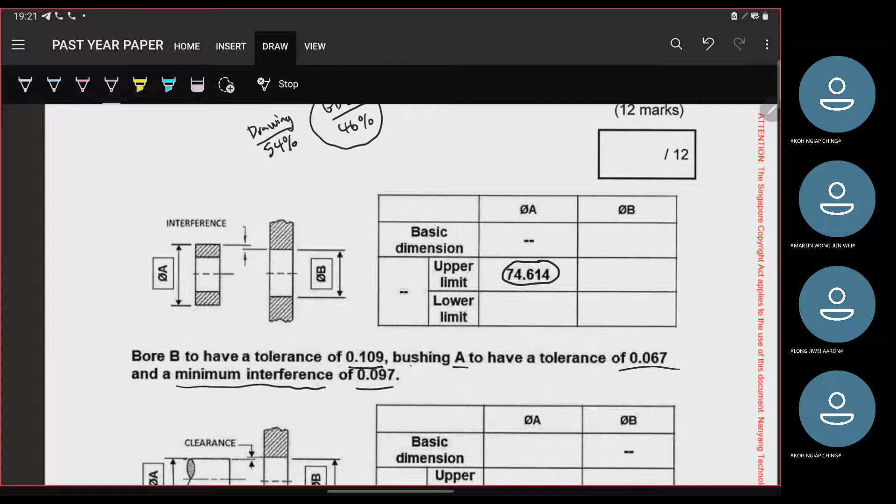So they tell you, Bore B to have a tolerance of 0.109. So tolerance band, this you can just take as a whole tolerance band. So then you can just use your calculator. For example, 74.614 minus—because this is upper limit, right, so obviously your lower limit will be lower than that. So in this case, this will be 74.505.

Then after that, more often than not, what you do from here is go upwards diagonally first—I'll explain why later. So upwards, then they tell you minimum interference 0.097. So 0.097 means you minus. So this is 74.408. Then the last one, the tolerance is 0.067, minus 0.067, 74.341.

Then after that, the last part is that this will always be maximum material condition. So that means this is gonna be 74.341. Okay, let me explain this.

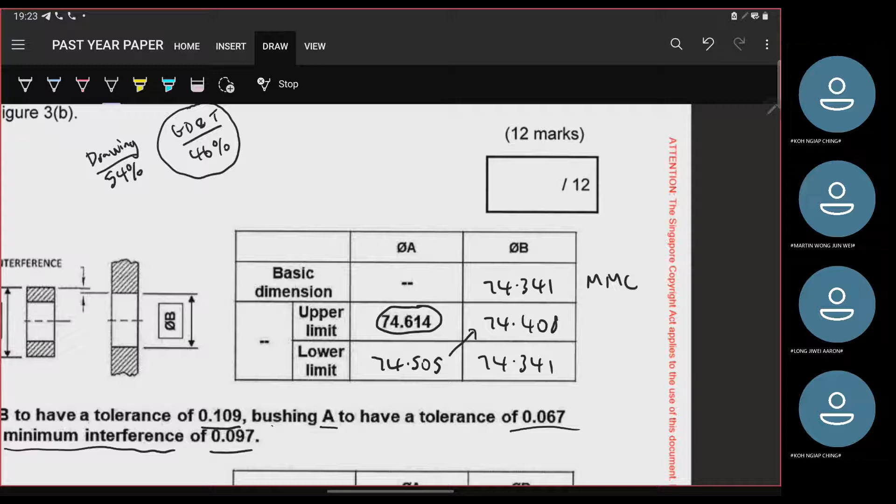Okay, yeah, so let me explain this. For these values, first thing, I think most of you all should be able to understand why I go from upper to lower limit. So the thing now is, theory wise...

So they tell you minimum interference, correct? So minimum interference means there's a maximum interference in a sense, which means this point over here, the biggest point—the smallest shaft should be linking to the biggest hole, because if you have a smaller hole, then the interference is gonna be higher. Or say you have a bigger shaft and a smaller hole, then the interference is gonna be even more. So what's gonna be the minimum point?

Will be from the smallest shaft to the biggest hole. Biggest hole. Okay, does that make sense? I hope that makes sense.

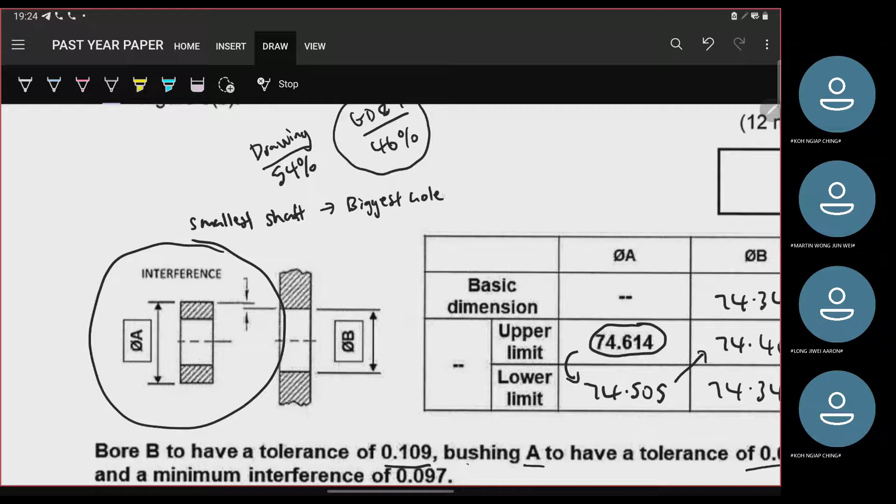So because of that, that's why you go upwards instead, that's why you have to minus and go diagonally. So you'll notice if you do more practice that most often it goes like this, in this direction, so it goes whatever limit they give you, then you go up or down, then after that diagonally, then after that go down again, something like this.

Let me see if I can.

So I hope this part is understandable. Okay, so this is one part. The next part is going to be a similar question, but this time they tell you what the hole is first.

This time they tell you the hole has a tolerance of 0.128. The original size is 56.635 plus 0.128. So this is going to be 56.763.

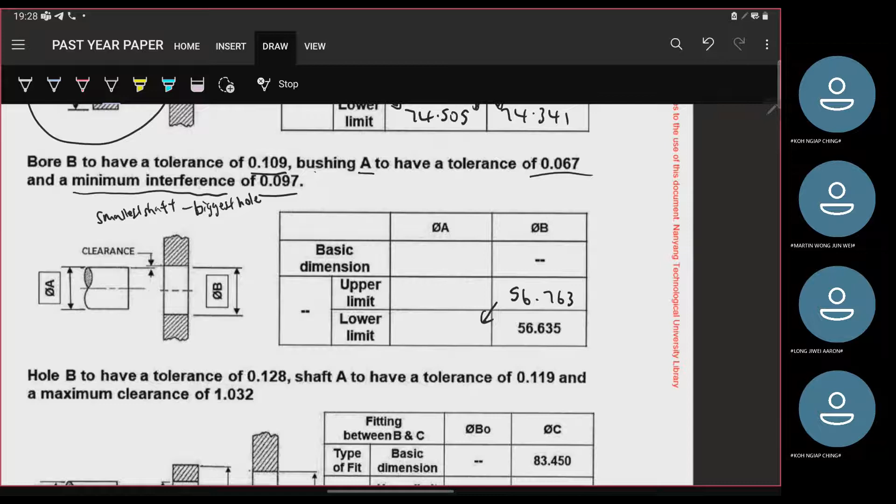Then they tell you it's 1.032. So that means 56.763 minus 1.032, and after you get 55.731. In the event where it was interference instead, A will be more than B. But since this is clearance, B should be more than A. I hope that's clear.

After following this, you just need to add the tolerance again. Shaft A has a tolerance of 0.119, so you add 0.119. So this one you get 55.850.

Then after that, same thing, same logic. Your basic dimension is going to be your maximum material condition. In the event of maximum material condition for shaft A, it's going to be your upper limit, that's the biggest. So this is 55.850, and this is your basic dimension for this question.

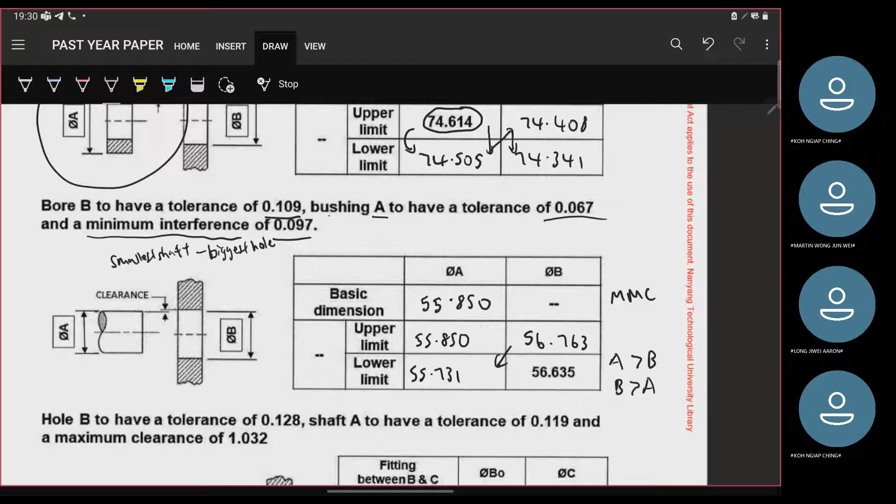I hope you're not too lost. Stop me anytime you get confused. Okay, so next one.

The next part of the question is basically kind of like cross checking. What you do for this is you have to look at the chart at the bottom, at the end of your paper, then you have to just do the calculations.

So the first thing they tell you is that it is 83.45. Put it 83.45 first. This is housing, so this is housing first. They gave you housing first, then they tell you it's force fit, between bushing B, and housing C.

Usually when they give you say a hole first, and they give you the dimension already, you can take it as this is going to be a hole basis. Then like for the next question, this is they give you A first, which is shaft, so this is going to be a shaft basis question. So they kind of test both directions.

So then with this, you've got your condition already, which is force fit. Then after, you also got the length, which is the diameter of 83. That means you can do your referencing already. Wait, okay, I'm not going to—it's a bit hard to scroll down, but never mind.

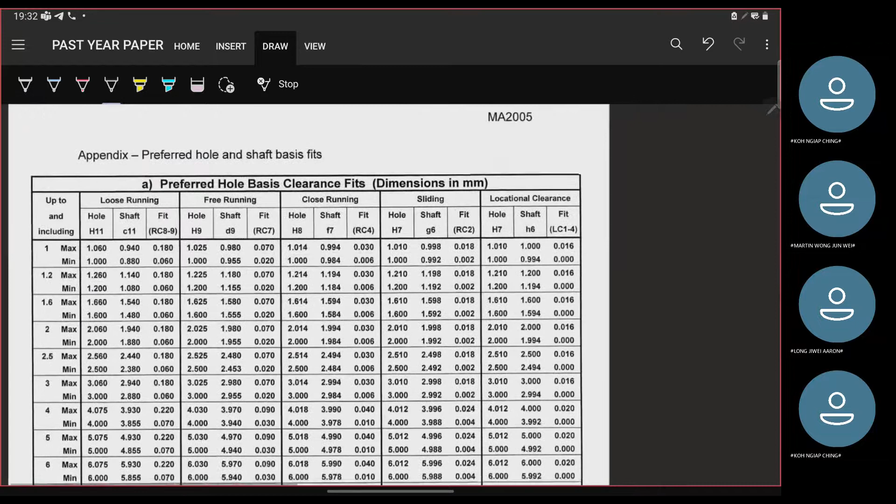I'll just go down. So force fit, usually this—so now you want to do shaft base, hole basis first, right? That's the first question. So hole basis, so you go to force fit. Then after that you're going to use 83.45.

So 83.45, when you look at your chart, this is up to and including. Since we have the value of 83.45, we have to use the 100 one, because 80 will not be used since it's up to 80 only. So this is going to be up to 100, and then after that, basically what we will need is this part.

Okay, so it's hole on the left and shaft on the right. These are all the measurements you need. Basically they'll tell you the maximum is plus 0.035, then after this is plus 0. This is for your hole.

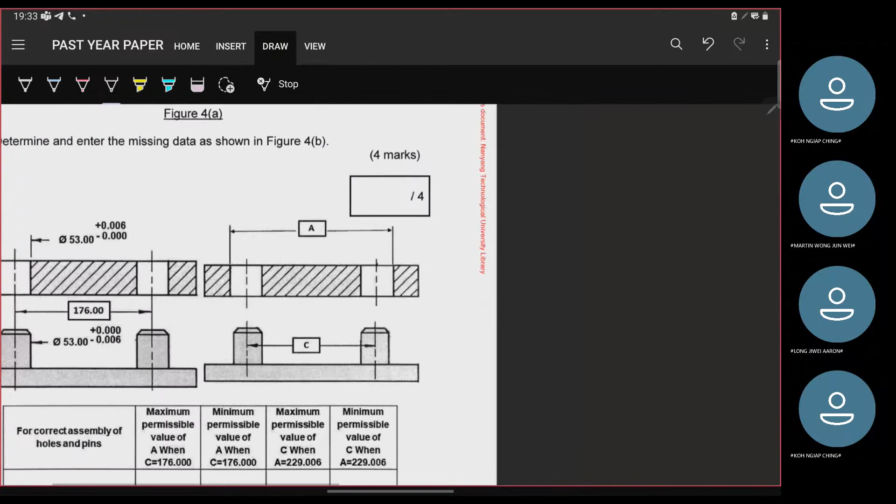So what you're going to do is transfer this all the way to the top. From there, 83.45, right? The first one, they tell you the upper limit is plus 0.035, so you add 0.035 and get 83.485. Then they tell you the lower limit is plus 0, so you just write 83.45 as well, 83.450. Okay so far.

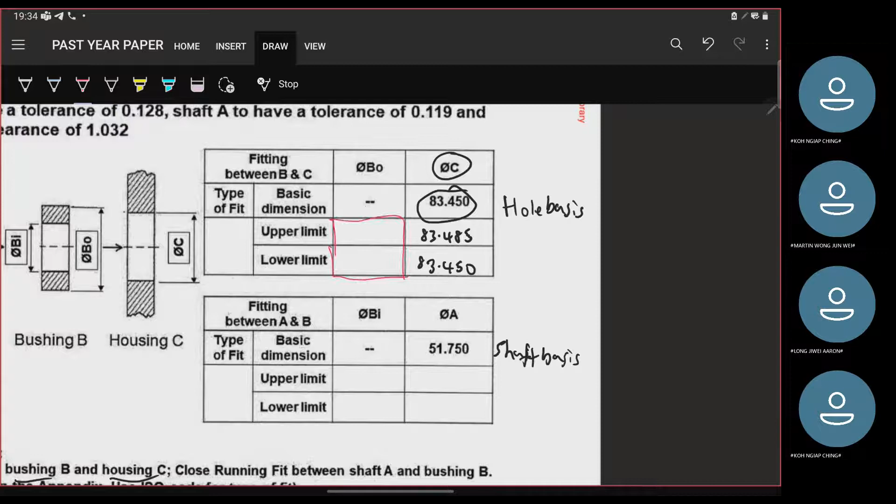Then after that, you need to fill in this zone. Now we're going to look at the limits again. One way you can identify is that we like to do the crisscross, like that. You can basically do the same thing. So this is plus 89. You can tell that the shaft is going to be the bigger one, from the biggest one, then you add this 89.

Then you can see the values here. The first diagonal is this one, then the second diagonal is this one. Why is it negative? It's because it's 0.035 minus 0.124, but it's because of interference. Since we have all these values, we can use the 0.089 and 0.146.

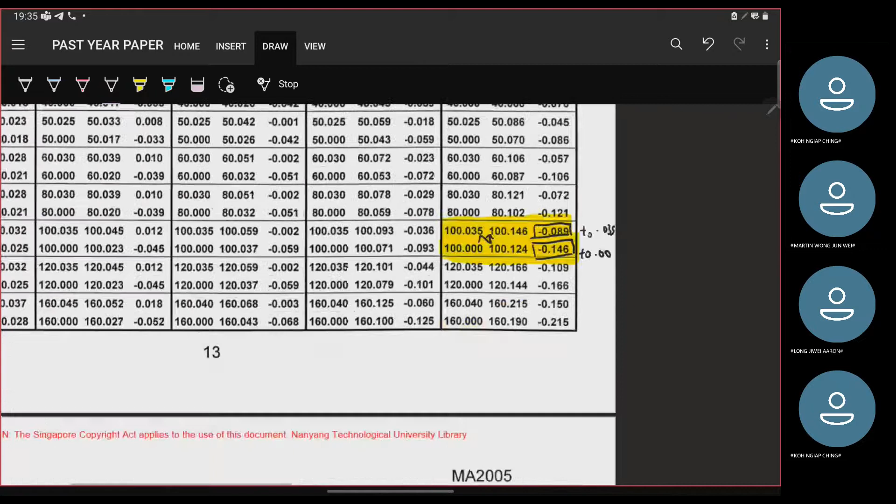So you can add 0.089 first. This will give you a value of 83.574. Then the last one to add: another way they tell you is the gap between lower and upper is 0.146, which means from our value we can also add it in. So 83.45 plus 0.146, you should get 83.596.

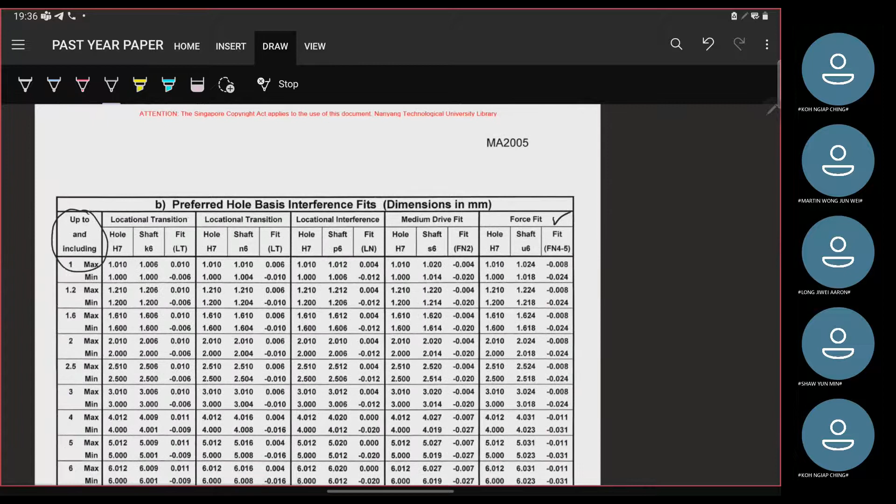Then the last part is the type of fit. For the type of fit, they tell you to use the ISO code, which means for the force fit, the ISO code should be this one. Oh wait, sorry, it's this one: H7/U6. I'll double check this again, but it's most likely correct. H7/U6.

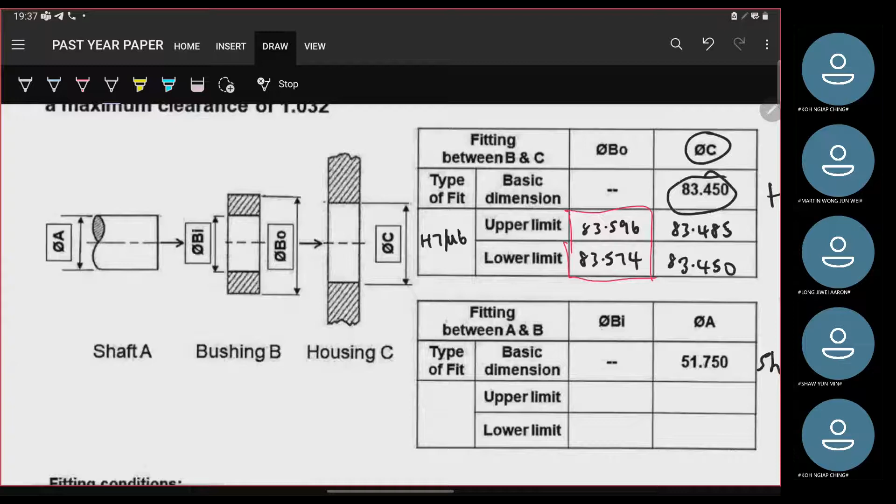So so far all clear, right? Let me just double check on something. Yeah, correct. So this is how it is going to be. Similarly to the first part, now we're going to carry on with the second one.

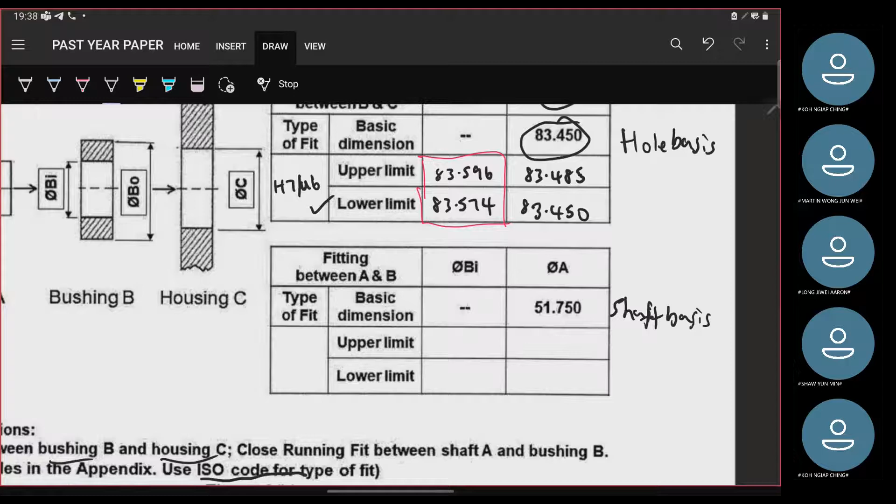For the second one it's pretty much the same, just that this time we are looking at the shaft basis. They tell you it's a close running fit. I'm just going to use my own chart so that you don't keep seeing me scroll. So this shaft basis, 51.75, close running.

I'll write the values at the side. So this is close running, F8/h7. Since 51 means we cannot use 50, we must use 60. The values that they give are 60.076, 60.030, 60.000, and the last one is 59.970. With that we can basically start already.

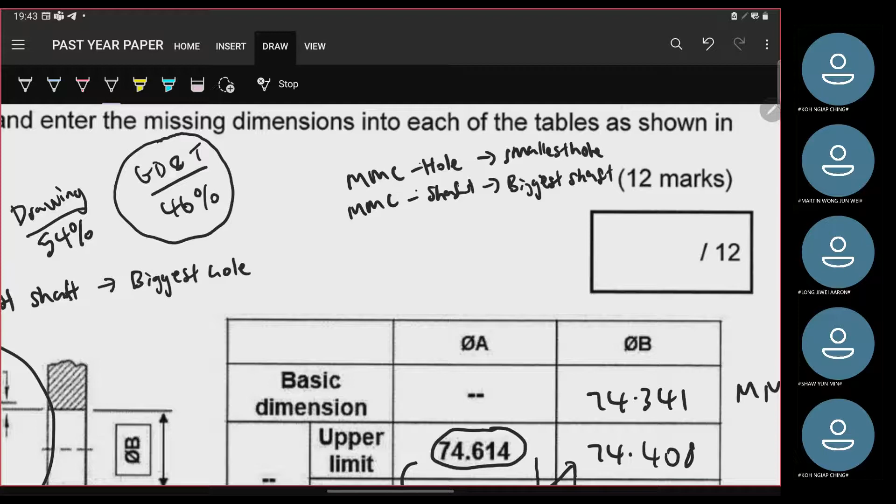Okay, but usually basic dimension, later if you look at how it usually is, it's a very nice number. But yeah, usually it's the MMC.

Yeah, so for this question, there won't usually be a case where you will have the shaft being the MMC. You won't really take the LMC to answer the basic dimension.

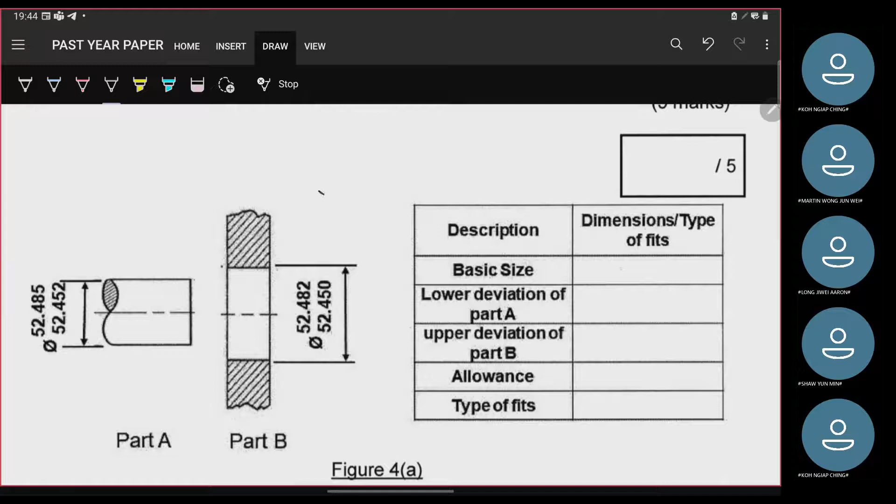Okay, so I'll just move on to 4A. For 4A, it's similar to your first question. So usually your basic size is gonna be in this case - it's usually taking this one, because it's the nicer one. So usually your basic size is gonna be 52.450.

Okay, so it's pretty very consistent. Usually it's very rare for you to go wrong unless they really give some very weird number. Okay, so the lower deviation of A - now that you know that, say now you set your basic dimension to 52.450.

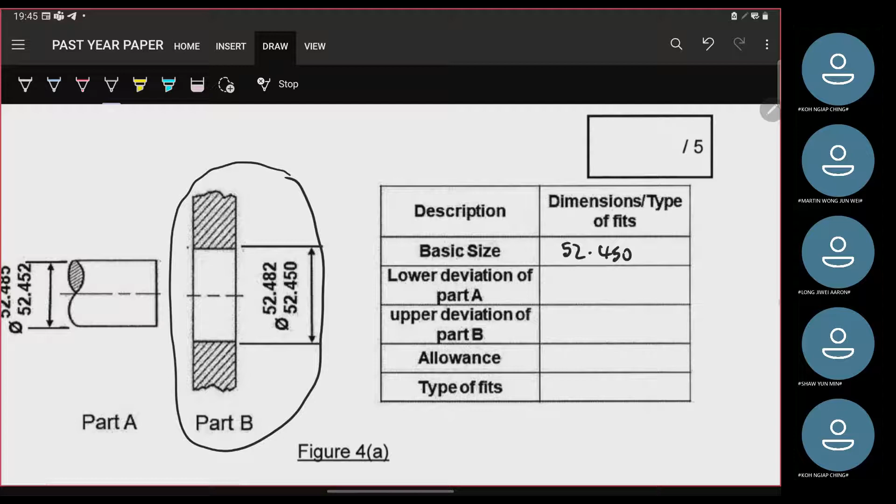Okay, so your lower deviation of A - your shaft is kind of always bigger, right? So you can roughly tell that this is gonna be slightly like a transitional fit, just by looking at the rough dimensions.

Okay, so lower deviation of part A, this is gonna be 0.002. Then upper deviation of part B is plus 0.032.

Okay, then after that, for your allowance, it's gonna be: allowance equals to MMC minus MMC. So it's gonna be MMC of hole minus MMC of shaft.

Okay, so in this case, MMC of hole is gonna be 52.4 - it's the smaller hole. So 52.450 minus MMC of shaft, right, which is 52.485.

Okay, so your allowance, you can tell it's gonna be negative. Allowance can be negative. So the allowance - I'll double confirm this again - the allowance gonna be negative 0.035.

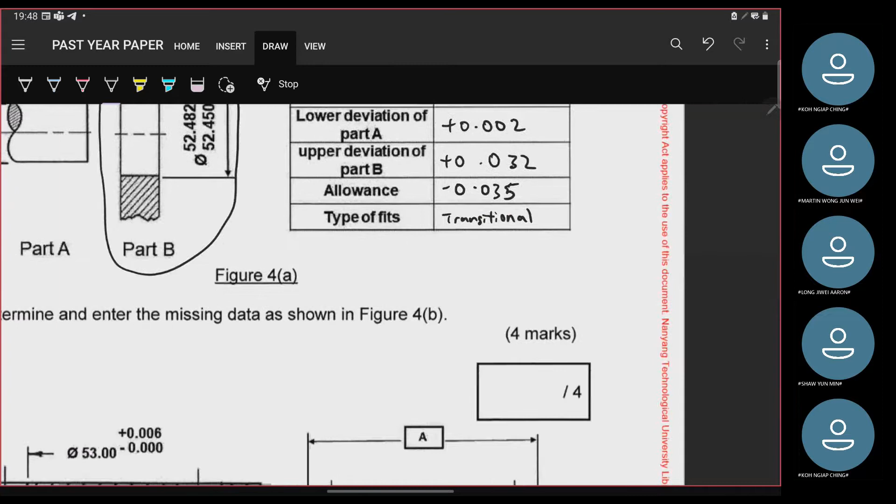So one way you can test: we did MMC versus MMC, right? And when we get negative, right? So what happens when we do...

LMC versus LMC instead. So now if we check LMC versus LMC of hole minus LMC of shaft, we will get LMC of hole is 52.482, and LMC of shaft is going to be 52.452. So this is going to be positive 0.03.

So you can see there's a positive, and there's a negative. So with that, you can conclude that it's going to be transitional, because these are the possibilities of it happening. So this is the reason why it's transitional.

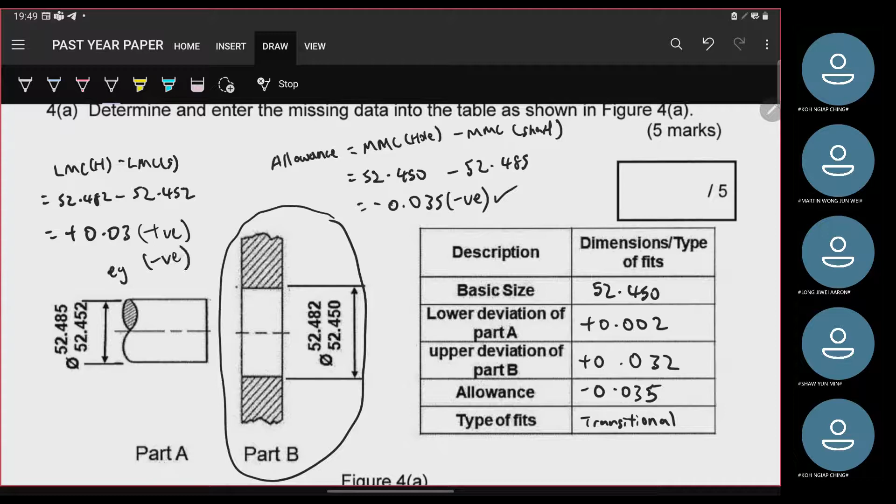In the event where you have a negative allowance, then after that, for some reason, say you have a negative here as well. In this example, you have a negative, then that will be like interference.

So you can just write here: positive gives you clearance, negative gives you interference. Then last but not least, positive and negative gives you transition.

Oh yeah, so 0 is technically positive. 0 is positive. So if you somehow get a gap of 0, it's still positive.

I hope I haven't lost anybody so far. So that's about it for 4A. It's quite simple, 5 marks only. Just don't get careless, because for GD&T, I guess the most common mistake is going to be a careless mistake.

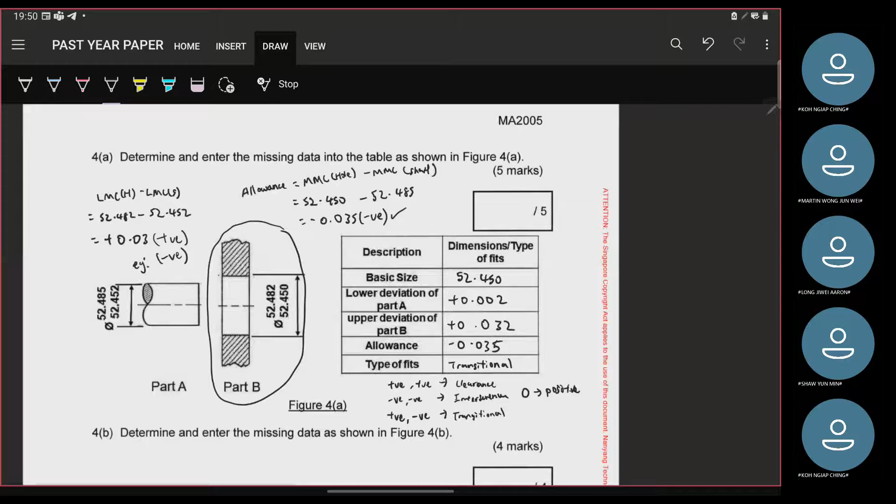Okay, so next question, I guess 4B. It's going to be the slightly more confusing one. It kind of needs a little bit of imagination. So for this question, you are given all these lengths.

Then after that they tell you both holes and pins are at their least material condition. So the least material condition for a pin... for the hole is going to be the biggest hole, right? So which means for hole, the dimension is going to be 53.006.

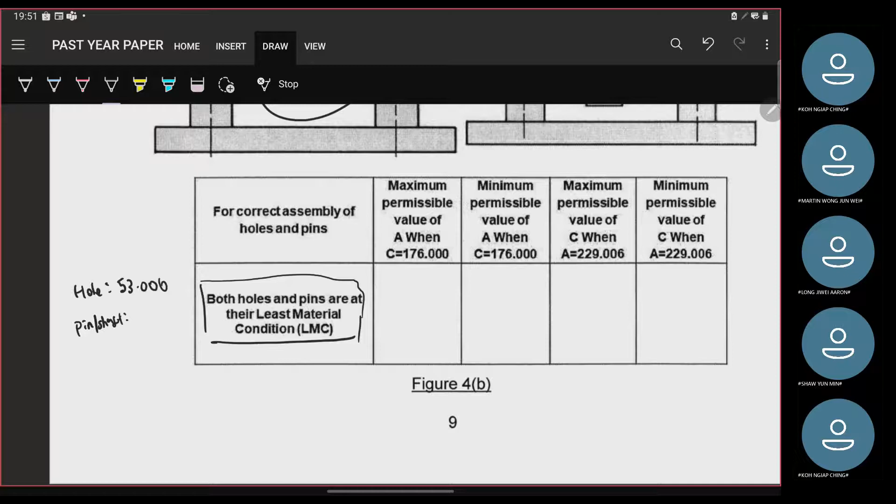Then for your pin slash shaft, the dimension is going to be least, right? So it's going to be 52.994.

So the first one, we slowly go one by one. So they ask you to identify: what's the maximum permissible value of A? A is the distance from this wall of the hole to the next wall of the hole.

So given when C is 176. So C is like fixed, C is 176. So what will be your maximum distance that A can achieve?

So that means your hole can spread - like the axis of your hole can be shifted. So this axis doesn't need to equal 176. So it can be bigger than that. So what's going to be your maximum possible distance, right?

So this is where I guess it gets slightly more confusing. So from here, what you're gonna do is fix part C first, like what they asked. Then after that you're gonna shift A out. So 176.

So this is gonna be 176 plus... okay wait, let me write down the whole thing first, then after that I'll explain. So it's 176 plus 53 plus 3 times 0.006.

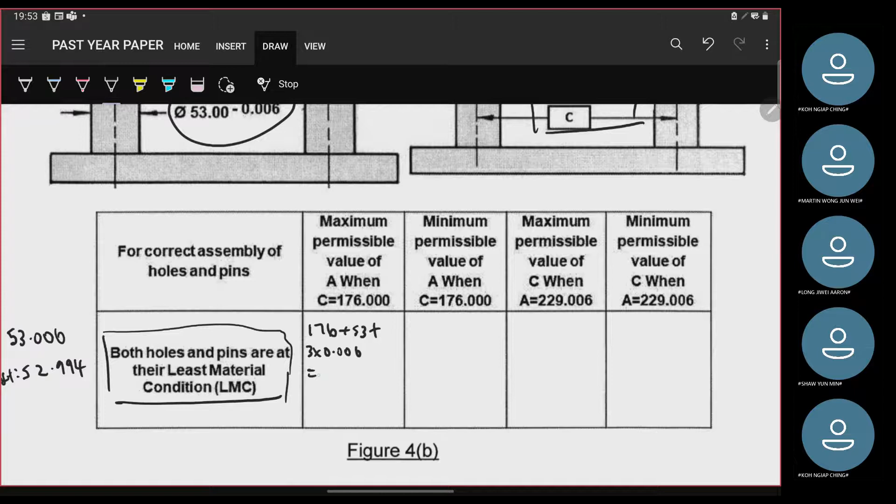So this is gonna be 176 plus 53 plus 3 times... so the answer for this is going to be 229.018.

So the reason why I get this value: the first thing, 176 is the basic, right? Then after that, 53 - you can imagine that I added half a pin and half a pin here. So that's all the basic dimensions first. That's where 176 and 53 come from.

Then the next part, they tell you since all the pins are smaller than 53, right, technically this little wall over here - let me use a different color - this little wall over here can just be shifted a little bit outwards more. And similarly for this wall, it can be shifted outwards just a little bit more. So you spread, but spread by how much?

Spread by 0.006, because your pin got smaller by basically 0.003 on each side. So it got smaller, so you can shift this zone to be a bit bigger than 176. I hope that makes sense.

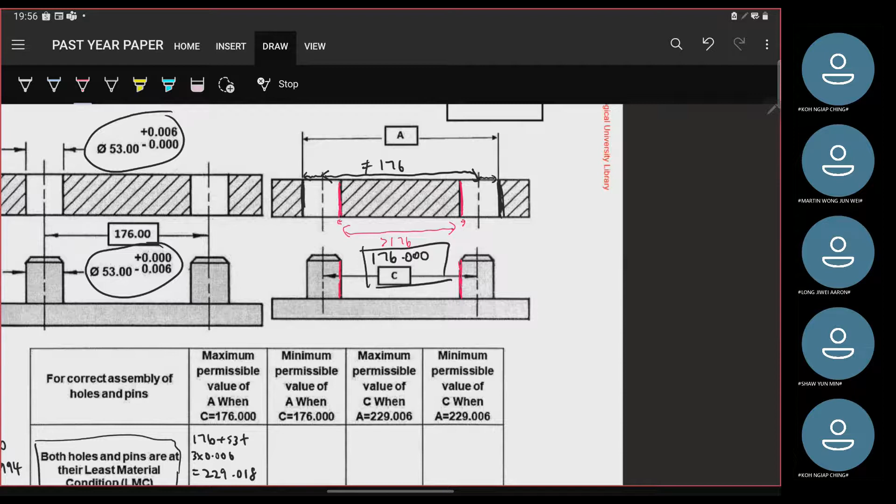So then because of that, basically it just shifts together, right? So since it shifts together, you add it both together. So that's where you get the 3 times 0.006 from - one is from the pin in total, then the other two is from the holes themselves.

I know it's a bit confusing. Okay, so if you all need me to explain it again, I will try my best to explain it better in simpler terms. Okay, good.

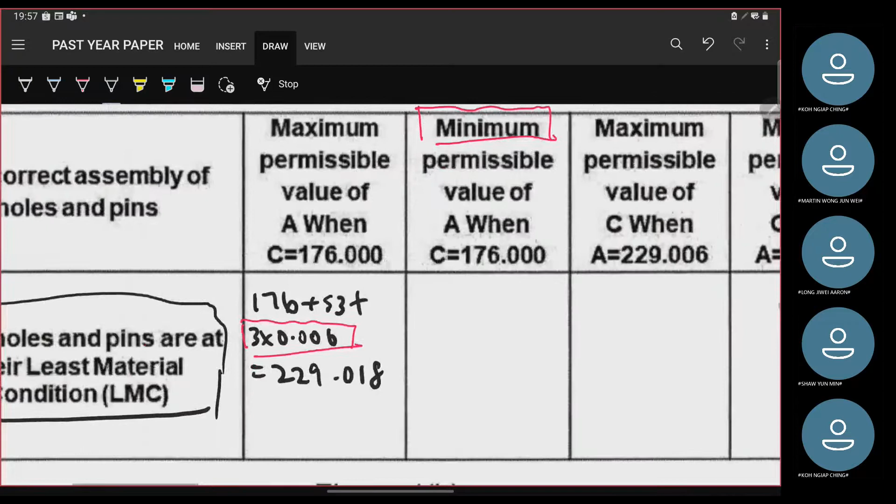Okay, so now similarly, they ask you, what's the minimum permissible value? This time it's the minimum of A when C is 176 again, right? So this time, we're going to start at 176 again. Then you can imagine that the walls of A went in a little bit, where blue touches blue, and blue touches blue. So you are forcing the holes to be together now. With that, what will be the smallest amount you can actually have? So 176.

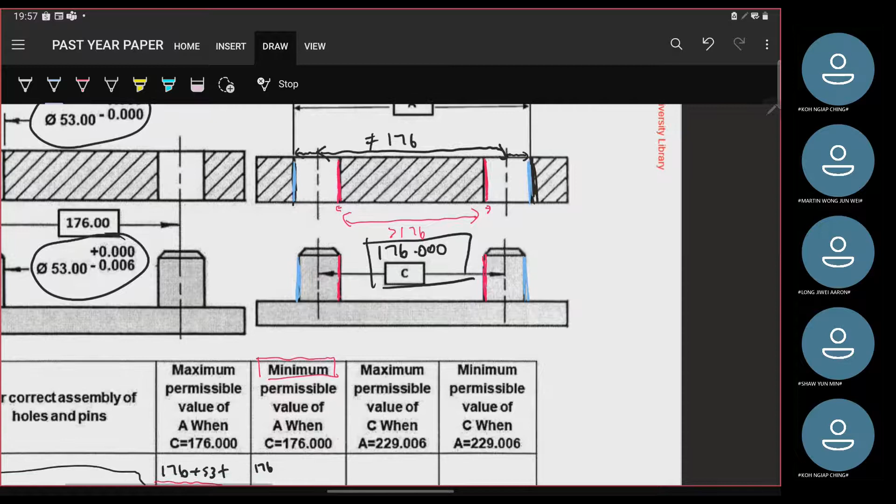One way to make it slightly easier is just 176 plus the pin. Because you're only adding to this point, right? So you can add plus 53, and after that minus 0.006. With that, that's actually the answer right there. So 176 plus 53 minus 0.006. So this is going to be 228.994.

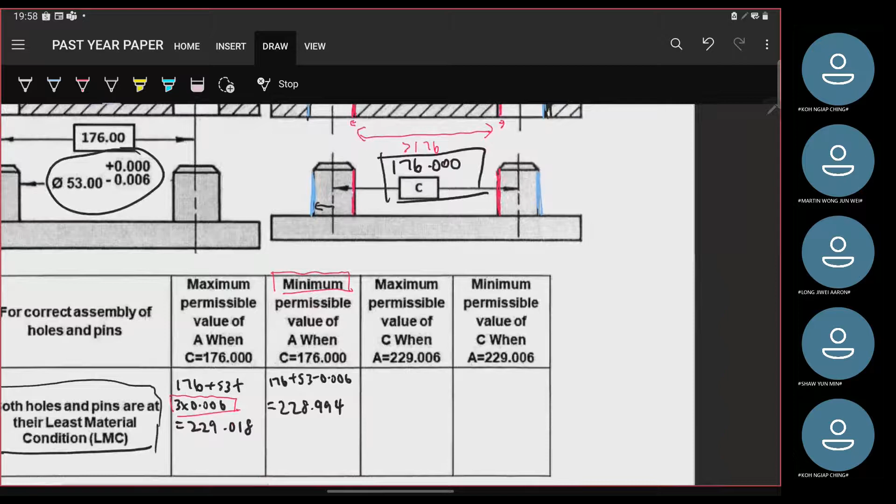Okay, does that make sense to everybody? I hope it does.

Okay, so now what I actually want you all to try to do is to see whether you can get this answer or not. Maybe I give you 3 to 4 minutes, maybe 2 to 3 minutes. Then you see whether you can get the answer, and after that we see whether it aligns or not. I want to let you practice the thought process of it. Once you get an answer, just type it in chat.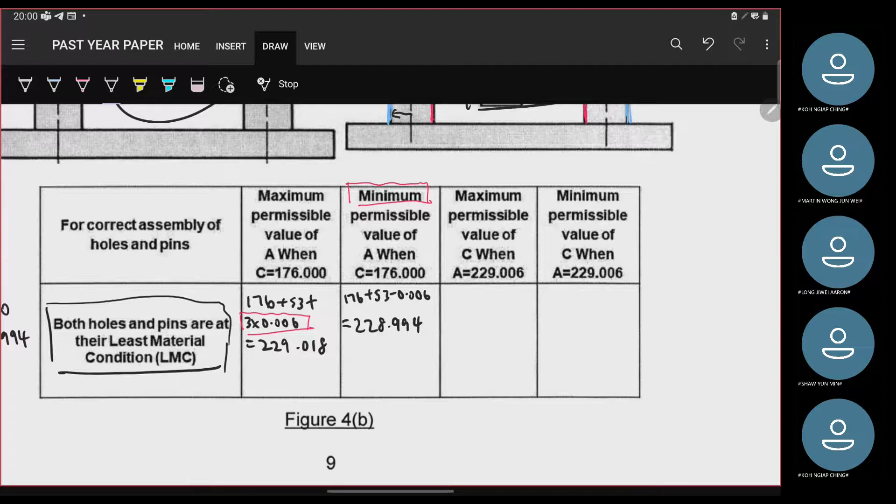How come it's 3 times instead of 2 for the first box? Okay, so for the first one, I'll use the more empty diagram. When will you achieve the maximum of A? Can you agree that it is when this wall touches this wall and this wall touches this wall? So the pink walls will touch each other.

Okay, if we look at the pin first, the pin became smaller by 0.006. So overall there's a 0.006 here, correct? So the pin contributed 0.006 overall. Then on the hole side, because now I'm not limited, from this to this, it increased by 0.006, correct? Because each hole increased by 0.006 each. Which means if I look at it, this also went a bit further by 0.006, correct?

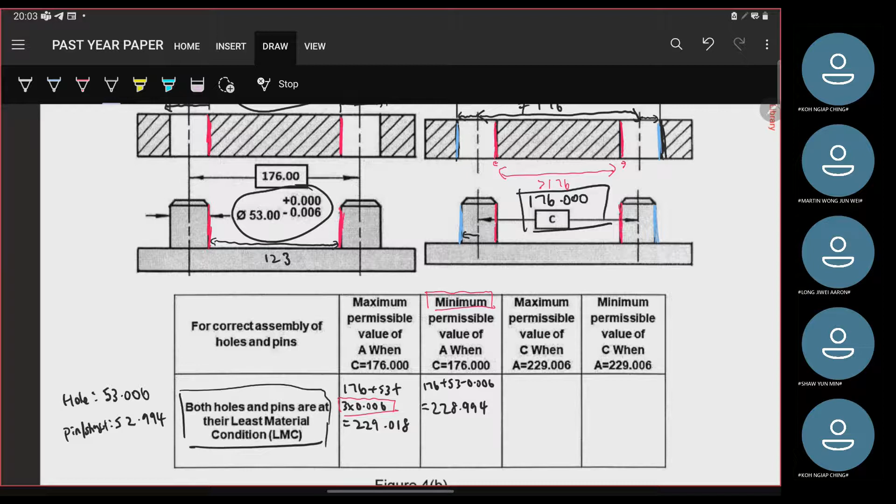So if the pin is now 176, this distance without the limit, will you agree that it's 176 minus 53? So this original distance from wall to wall, without the 0.006 first, is 123. Now the pin is also at LMC, which means the pin got smaller, right? Remember I said that the pin is 52.994. Since the pin got smaller, your holes can shift even further, because now I have an extra little space that I can go towards. This is going to be 0.003 on this side, and 0.003 on this side.

Say you try to imagine that you're holding your two hands in front of you flat, right? Let me just try to draw a very bad drawing. So let's say now you have your hand, and then after that, another hand. When you have this hand, maybe I tell you that your hands never shift. So this distance is fixed, but the one in pink is not. The distance for the pink one is not.

Now I tell you that you're going to close in your thumb. So now your thumb is gone. I'm going to cut away your thumb. With that, my new distance is going to be from index finger to index finger, because now my hand got smaller, right? Which also means that now you imagine this is your pin. So this is now your new pin wall that the hole needs to touch. Does that make sense?

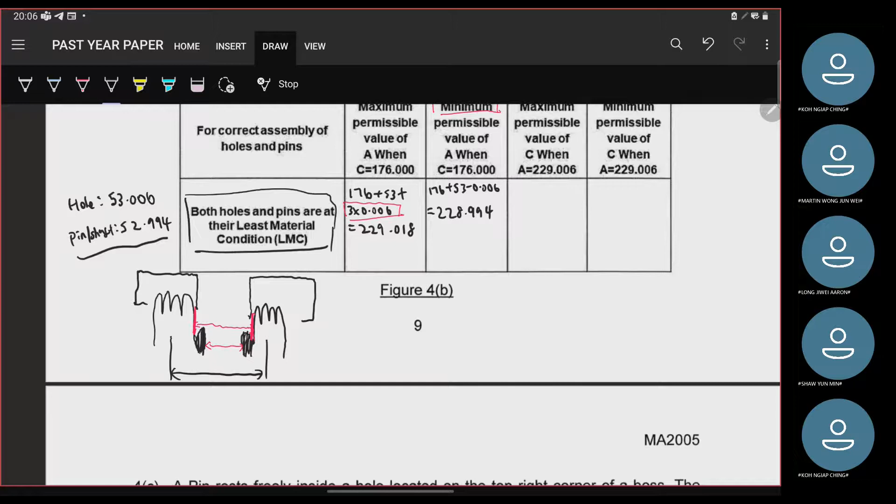I don't know whether the analogy will be better or not. How come the hole needs to touch? Because you want to find the maximum. So basically now you're just going to shift your hole to the max that you can go while still maintaining that the pins will go into the hole. For the first box is max, for the second box is minimum. So the minimum is how much you can squeeze your hole inwards such that the pins will still be able to go in. Okay, so I hope that's clear.

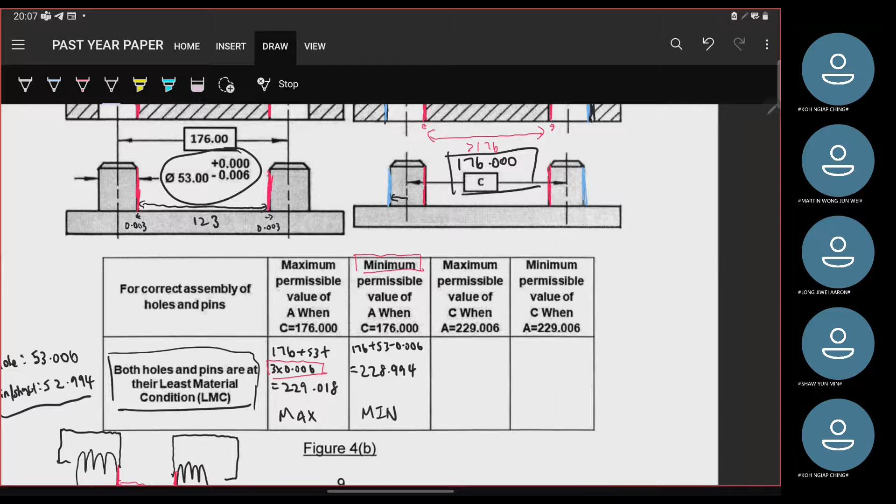Now they ask you to find the value of C. So now instead of fixing C, they fix A this time. Let me just erase this first. Now they ask you what's the maximum permissible value of C when A is 229.006. So how are you going to do this?

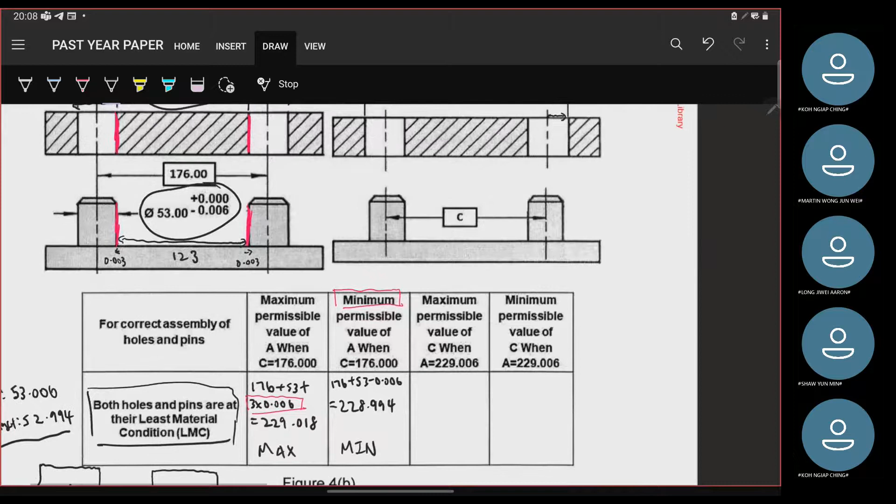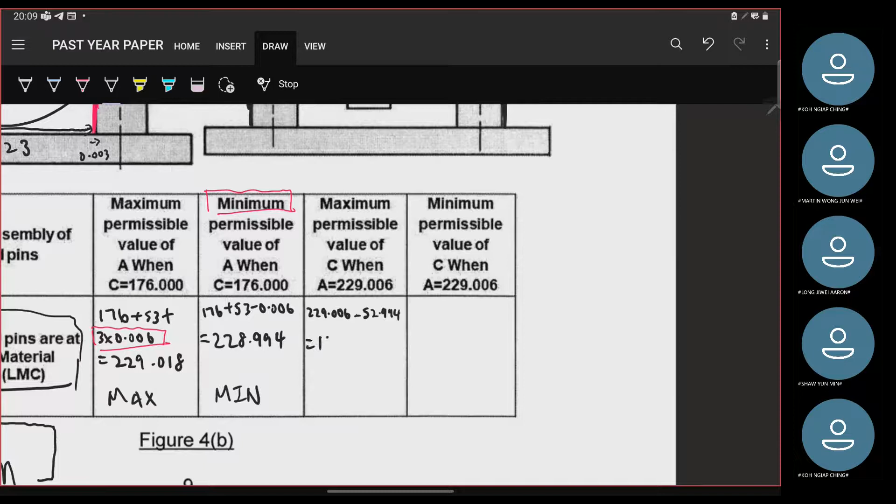Maximum is always when the outer wall touches the outer pin. So it's always going to be something like this, because you want it to be as spread as possible. What you're going to do with 229.006 is minus, this time, just one pin instead. So 229.006 minus 52.994 will give you 176.012.

Similarly, for the minimum permissible value of C, you want this wall to touch this wall, but this time while making sure that A is fixed. I'll write out the thing first. It's going to be 229.006 minus the two holes, so 2 times 53.006, then plus one shaft in, so plus 52.994. This will give you 175.988.

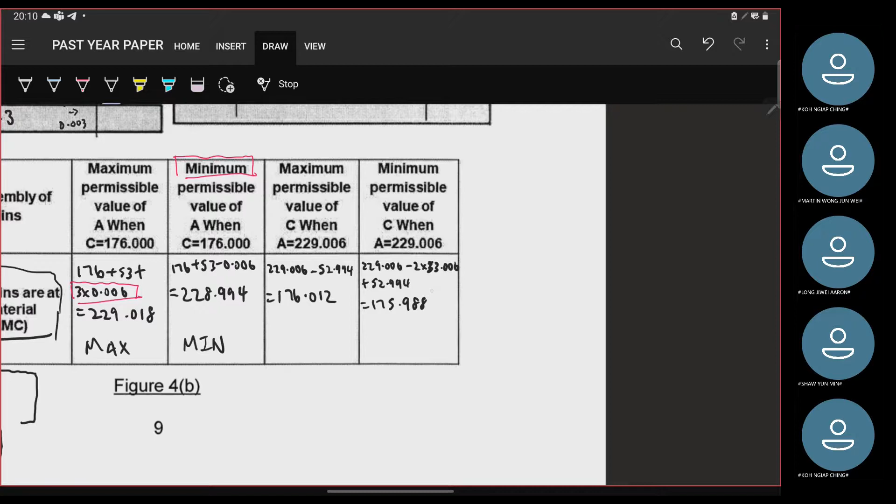I'll give you all a while to look at it, think, and see whether you understand how I ended up with this answer. I hope the first two parts are clear enough already. And for this question, there needs to be some level of imagination, it's a bit hard to do it without.

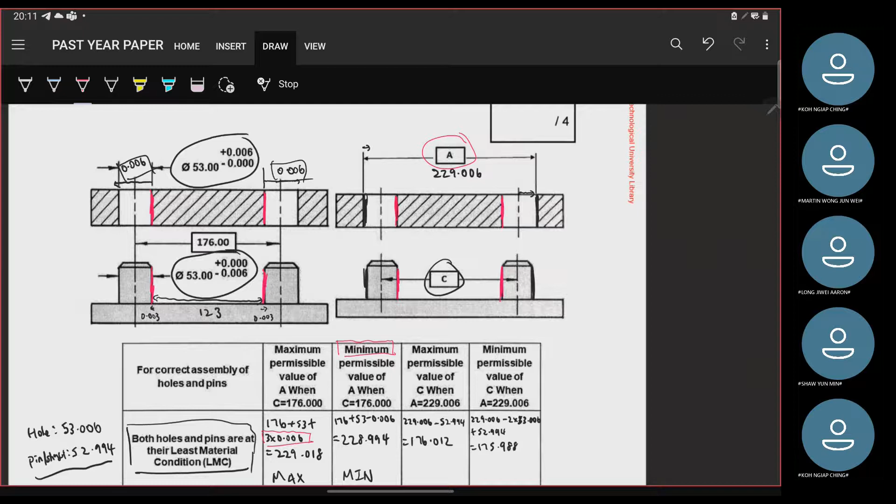Usually what happens is they'll tell you that I'm going to fix a point, maybe point C, then A becomes a variable. Either that, or they tell you to fix point A, and then C becomes the variable. Then you just need to work out accordingly: in the event where one is fixed, how far can you push the other one so that it still stays within your limits?

This question has nothing to do with interference. You won't really get interference for this, because it's actually a clearance fit. The only way that you can let your pins move around your hole is if you have a clearance fit. If it's perfectly interference, then this question will be invalid already, because you can't do anything. You'll just be stuck there.

Okay, so Martin, I hope that answers your question. Alright, so if you all need to, I'll go through it one more time. Then maybe I'll revise it one last time next week, when we have our last session.

Okay, so that's actually about it for this 4B. It's 4 marks only, so expect just 1 mark each. You have just 1 mark per box.

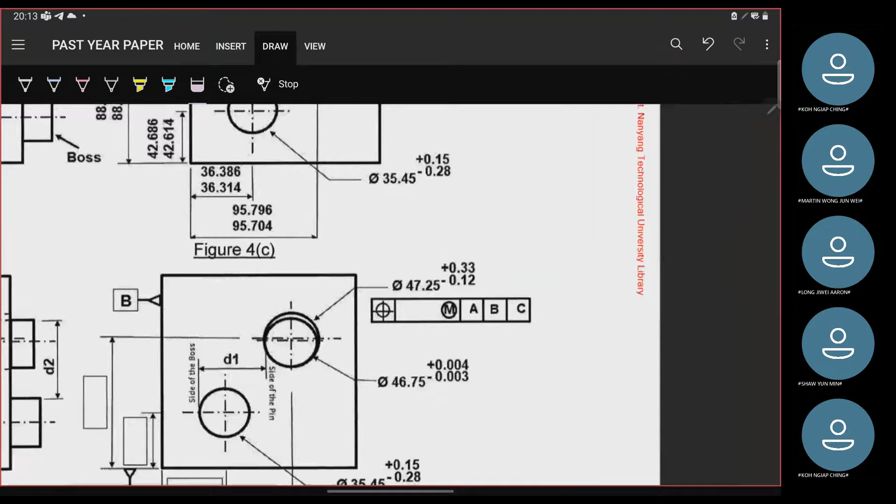Okay, so 4C is gonna be I guess the most confusing one, so do bear with me. For this question, they gave you some dimensions. So your first portion is all your dimensions. Then after that, you are expected to fill in all the blanks at the bottom.

There's about 10 blanks, right? So most likely this is gonna be 2 marks, this is gonna be 2 marks, this is gonna be 2 marks, this is gonna be 2 marks, then this will overall be 8 marks. Okay, so I'll go through this question step by step first.

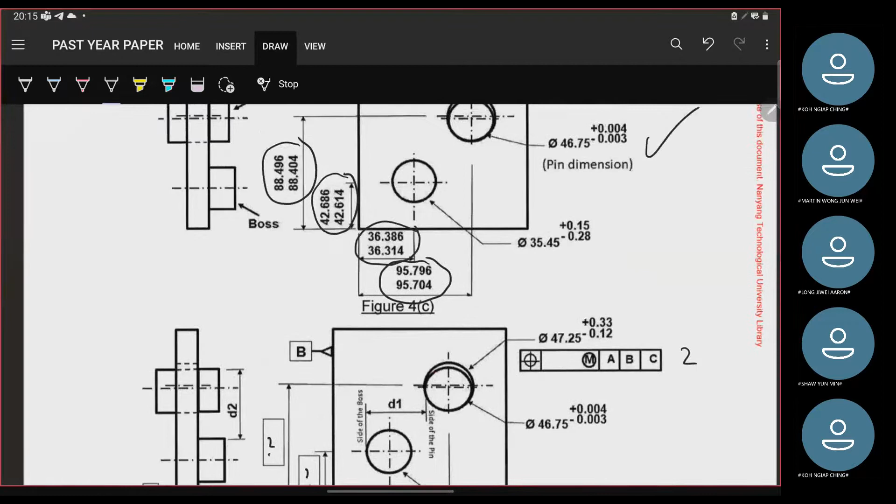So first part they tell you some things to take note of, all these figures. You see the numbers are actually quite nice, right? First part usually they tell you to calculate these values because these are the easiest values to get. Because it's more of position, like tolerance, usually you just take the center of it.

So for all these values, usually you just take the average: 88.496 plus 88.404 divided by 2. Usually you have a very nice number, 88.45. Then usually we read the question. They'll tell you what decimal place you must end up with. For example, position tolerance must be rounded to 2 decimal places, that kind of thing.

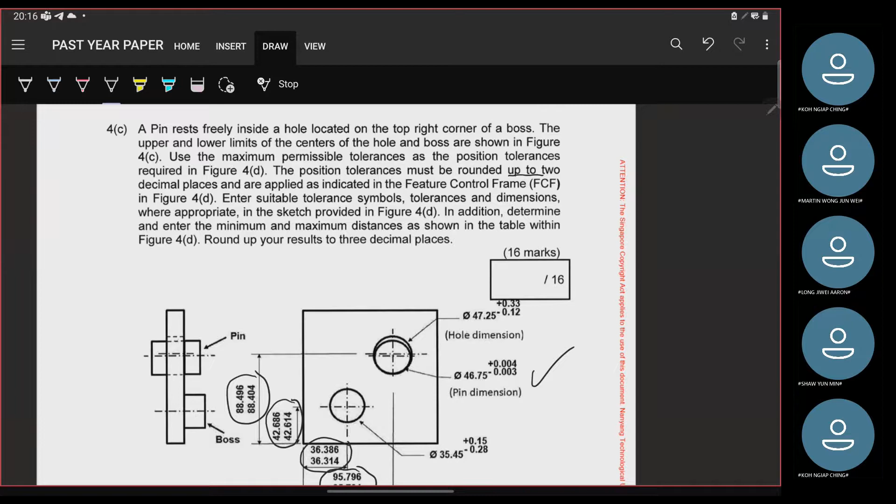Then after that they will tell you about the feature control frame. Usually there's an M, then there's an L. For the feature control frame you don't need to fill it in, they'll fill it in for you. But if the question asks for maximum material condition, this will give you an M. Least material condition will give you an L. Then the last one is a bit rarer, it's reference something. That one you don't need to put in anything, you just leave it blank.

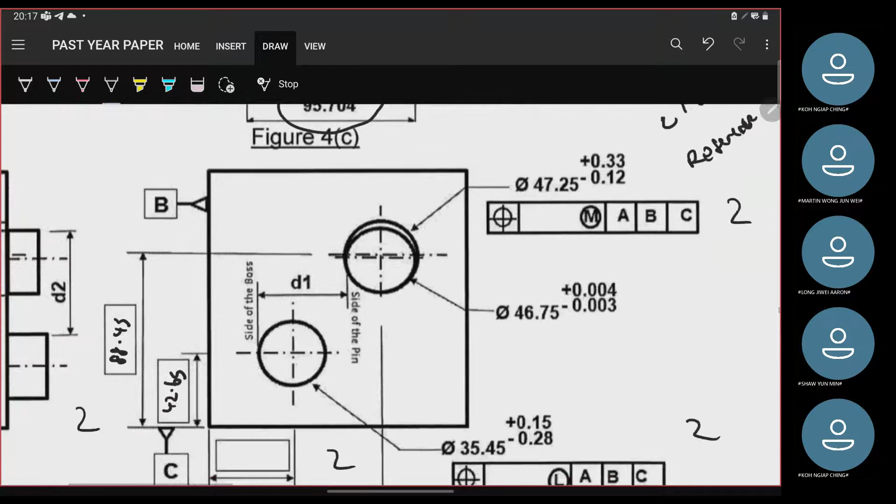So the first thing usually you do is get all these values first. 0.686 plus 0.614 divided by 2, so this is going to be 42.65. Then 0.386 plus 0.314, so this is 36.35. The last one, 0.796 plus 0.704 divided by 2, that's 0.75. So this is 95.75.

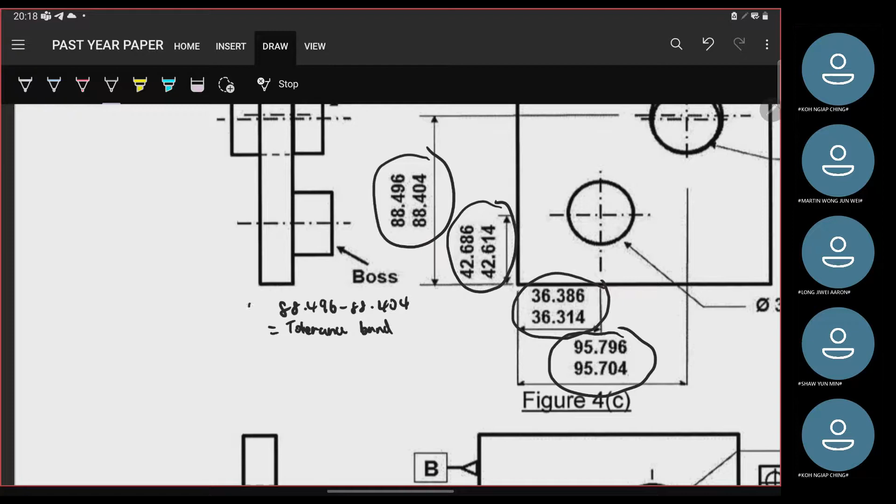Next is where it gets slightly more confusing. I don't know whether the prof went through it during lecture. But if you do 88.496 minus 88.404, this will give you the tolerance band. This is upper limit and lower limit. You can imagine that for this hole, the axis can be somewhere here, here, or here, between 88.496 and 88.404. You can shift within this zone. That's your tolerance band.

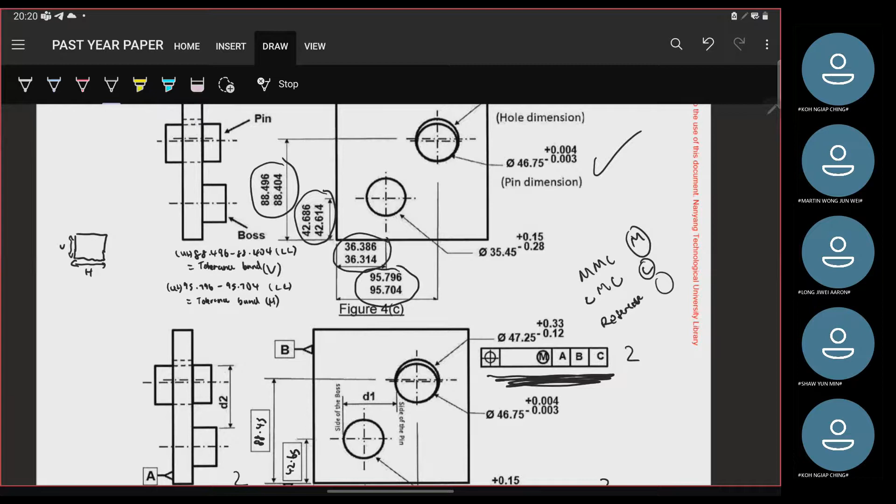Then similarly for the horizontal one, it's the same thing. The previous one was vertical. So similarly for your tolerance band, you're gonna have a horizontal one. In this case, 95.796 minus 95.704, which should give you the exact same value. Upper limit, lower limit, and this is the horizontal tolerance band instead. With that, now I can draw a square, with this vertical part and this horizontal part. What this positional tolerance wants you to do is calculate the diagonal. One way to look at it is as a circle, so this becomes a diameter.

Okay, so I hope that makes sense. So basically what you're trying to look for is like a bit like the diameter of the circle. If you can roughly see what it looks like, it's gonna look like a Pythagoras theorem. So what you actually want to look for is vertical squared plus horizontal squared.

So for example, for this, 88.496 minus, so what you're gonna have here is 0.092 squared plus 0.092 squared, times 2, square root. Okay, so this will give you 0.1301. Then I just want it to be in 2 decimal places, so 0.13, that's 2 dp. And so this is the value that I want here, like they want here. So this is 0.13. I hope that's clear.

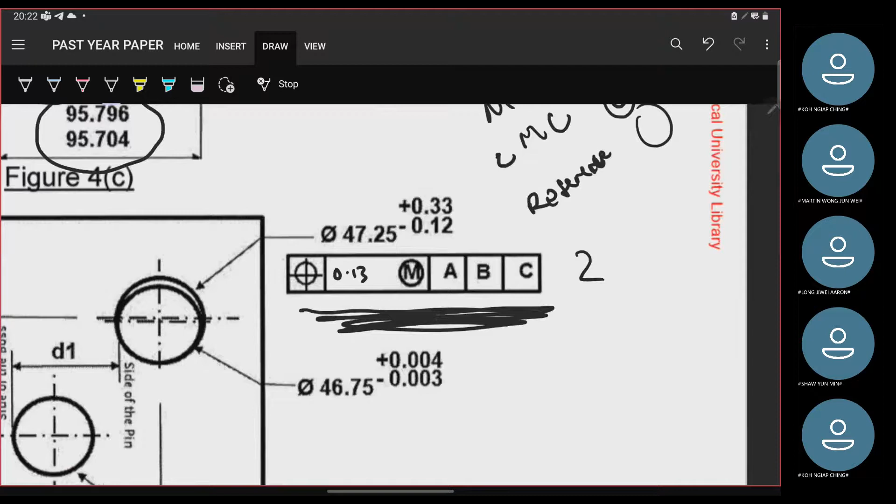So with that, you should be able to do the second one just the same. The second one is similar - you just take the tolerances of this one and this one to get the second value, and the first one is this one and this one to get this one.

Okay, so that's actually all you need. Don't need a diameter sign in front of the 0.13. No need, because if you realize, this is not actually a diameter - this is more like your positional tolerance, which means how much can you go horizontally, diagonally. So this is not diameter, this is how much can you shift. What's the diameter of the area you can shift - but it's given that it's the diameter, like it's a zone, not an actual circle.

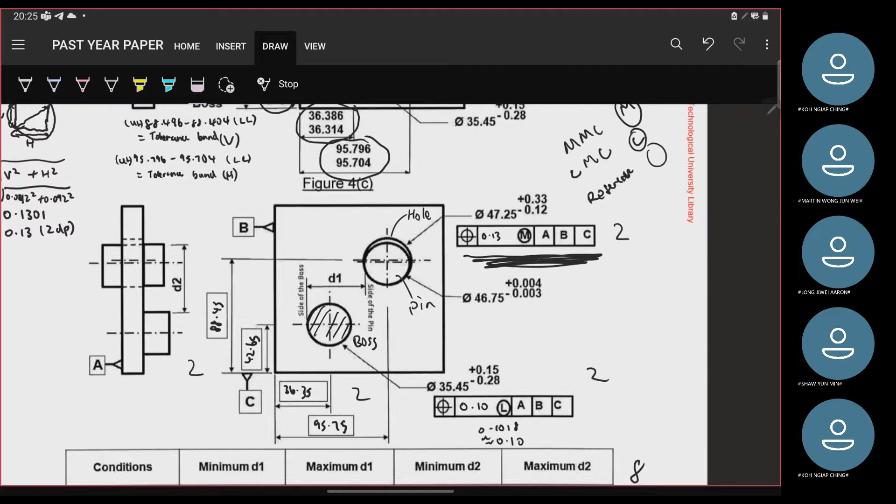So your hole and your boss are just basically - this thing is your boss, then your hole, well this is your hole, then this is your pin. So they kind of actually label it for you already. Then they also give you the dimensions. So now I'm just gonna fill it in a bit. So they tell you hole and boss are at LMC, pin is at MMC.

Dimensions wise, I'll just write it aside: hole, boss, pin. So hole is LMC. LMC means it's the bigger hole, which means it's 47.25 plus 0.33.

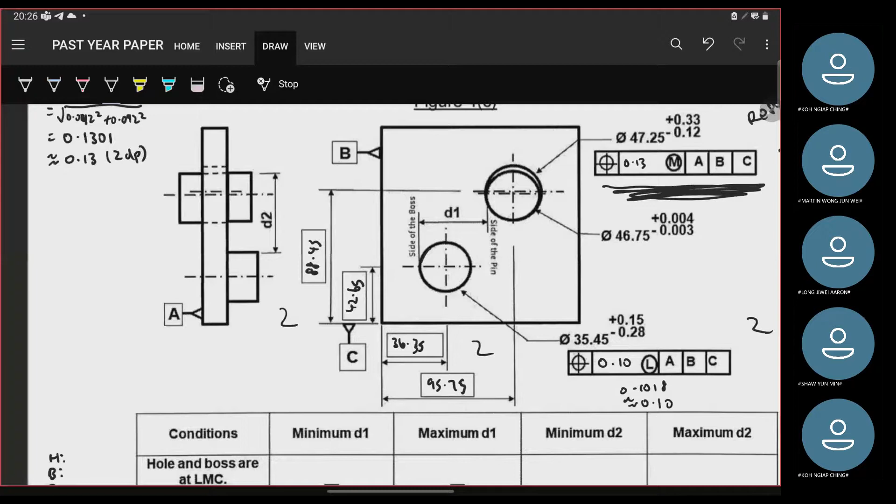Hey, wait a minute, give me a moment. Let me double check something. Okay, wait, let me write down the values first. Give me a while. Yeah, okay.

So for hole, hole at LMC is the bigger hole, so 47.25 plus 0.33, so this is going to be 47.58. Boss is 35.45 minus 0.28, minus is LMC, so this is going to be 35.17.

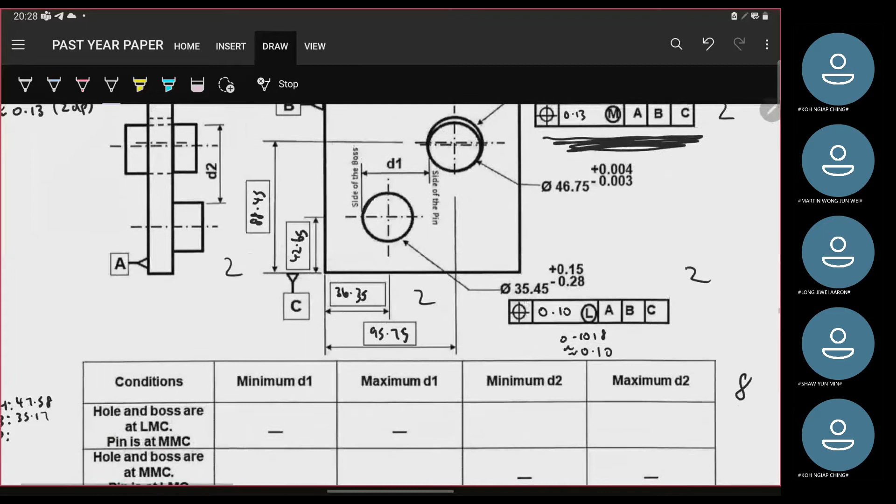Okay, last one is your pin. Your pin is at MMC, so pin MMC is plus, so 46.75 plus 0.004, so this is 46.724.

Okay, then let me just write down the others first. So hole, boss, pin. This time hole and boss are MMC. So hole MMC is when it's the smallest hole: 47.25 minus 0.12, that's 47.13.

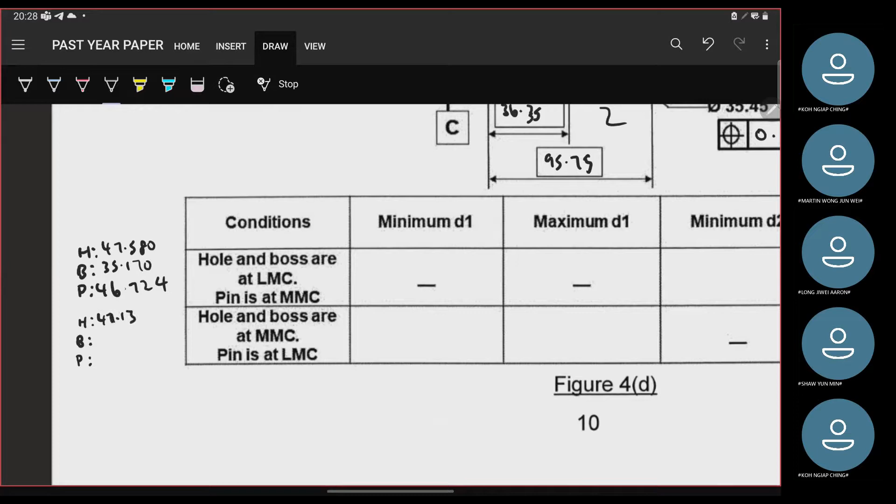Then after that, boss is maximum, so it's 35.45 plus 0.15, so this is 35.6. Last one, pin is 46.75 minus 0.003, so this is 46.747.

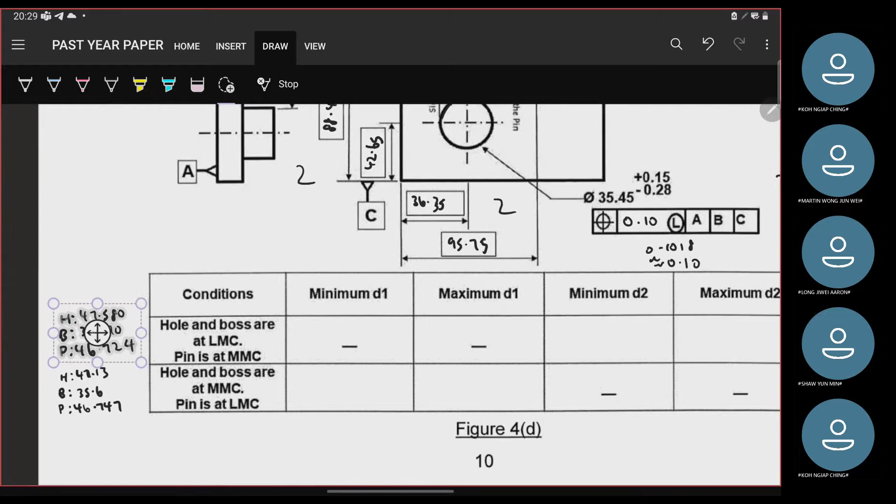Okay, so I guess this is gonna be the slightly confusing part. Okay, so what we're gonna have to do, right? They tell you minimum D1. So the first thing they tell you is, oh wait, maybe I do D2 first, because it's on the same line. So we're gonna shift this over here, so it's easier to see.

Okay, so minimum D2. Right, so minimum D2 they tell you is, so D2 is here. If y'all can see, D2 is gonna be from the top of the boss all the way to the top of the pin. So if y'all try to think about it, what do you think y'all need to add or minus so that y'all can get minimum D2?

Okay, maybe I give you a few seconds to think. Yeah, okay so...

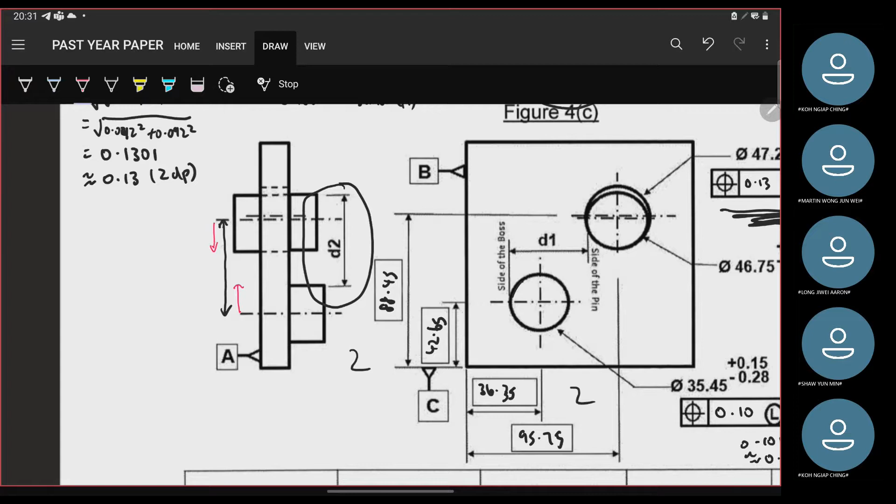Okay, so if y'all think about it, D2 in a sense is gonna be, if you want to look at it, the gap between the two center lines. Then after that you're gonna minus the hole. You're gonna plus, wait, let me just- you're gonna plus the boss, then minus the hole, then after that plus the pin. See whether y'all can understand that or not.

Okay, so I'll just write it down. So: gap, minus half boss, minus half hole, plus half pin. Okay, does that make sense to everybody?

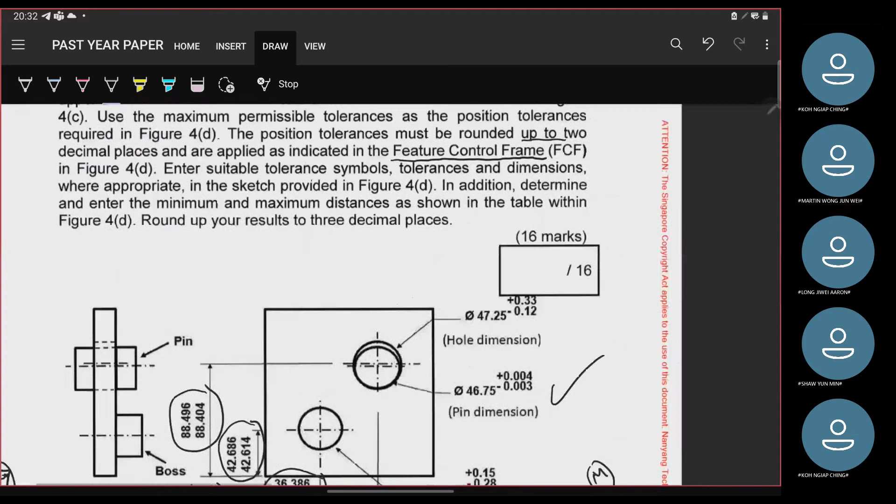Okay, so if you can understand why, mainly it's because, for starters, if you look at this diagram, D2 is to the top of the pin. But the pin they got say that it's resting on the hole itself. So a pin rests freely inside a hole. When you say freely it means by gravity, right? This pin will always be at the most bottom of this hole, so the pin will always be resting on this thing.

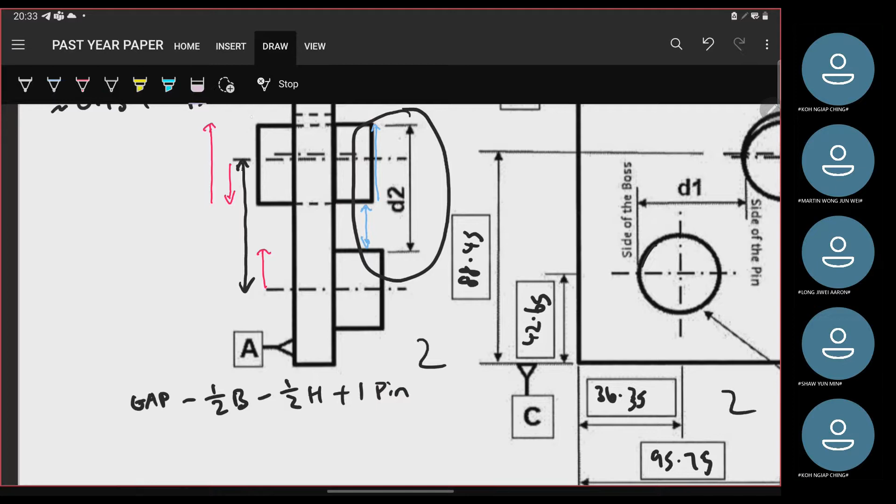So with that, to achieve the desired gap, you're gonna have to find out what's the gap between- let me just draw a different color, the blue one. You want to find out what's this gap, then after that you're gonna add a pin in. So this gap is gonna be the gap between the center lines. Then after that you minus the boss and minus the hole, not minus the pin, minus the hole. Then add the pin. So that's how this comes about.

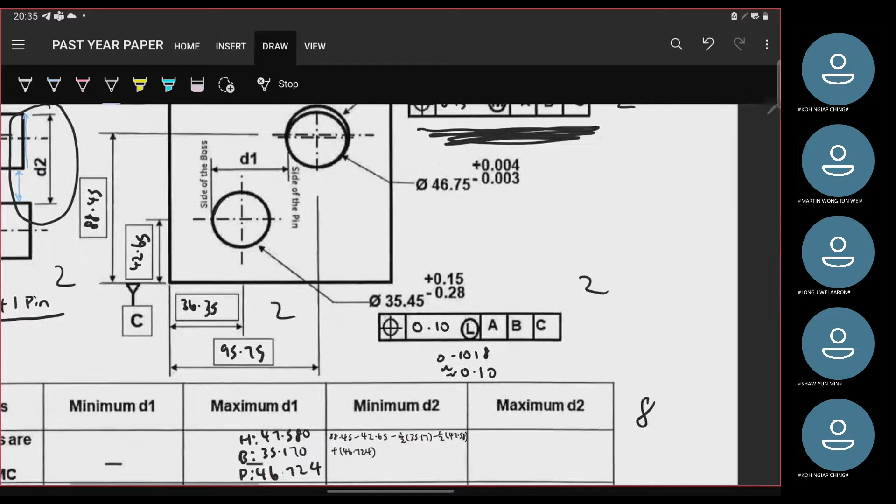46.724. Okay, so the last part, which is I guess slightly weird, is to add your positional tolerances. So what does that mean, right? So first you see that you have a 0.13 and a 0.1, right? And they have letters, right? So you're gonna have to deduce whether you need to add the whole thing or you need to add just a little bit.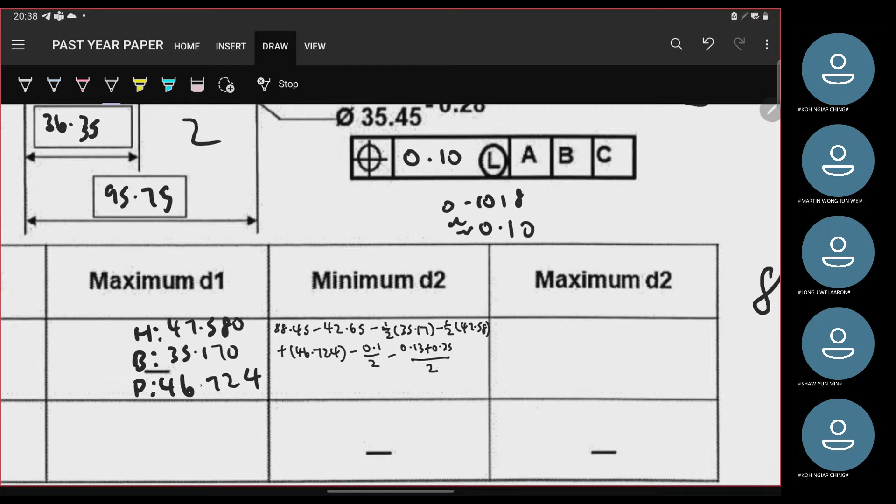Yeah, let me double check something.

Okay, so this is going to be a bit confusing here. For example, for minimum D2, you want this D2 to be as small as you can. So you have to shift the center lines closer together first. To do that, you need to have some steps.

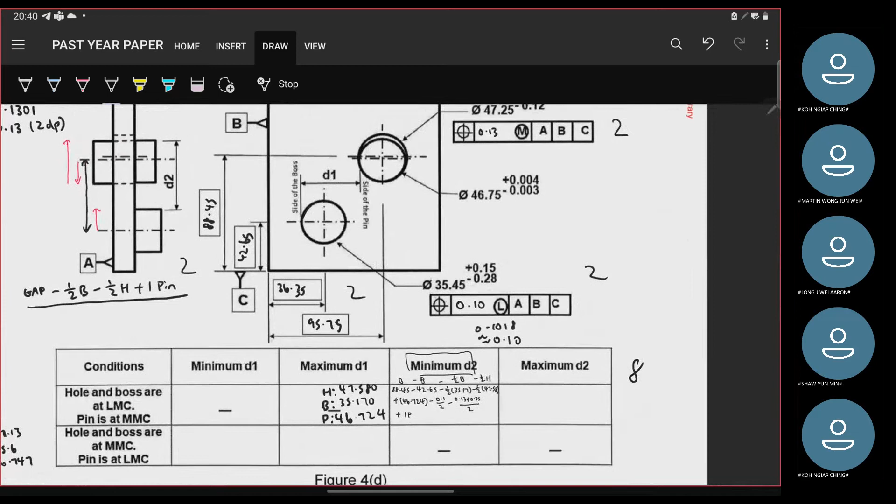This part, you have to minus the tolerances that you want. In this case you want it to be closer, so the determining factor is going to be the L and the M. For example, if they tell you hole and boss are at LMC, then we need to look at whether the L and the M in the boxes over here and here match the condition that you are matching.

So if I tell you that hole and boss are at L, you can see that M is different, but L is the same. When it's the same, you only minus the positional tolerance. I don't really know how to explain this very well, but basically that's the thing.

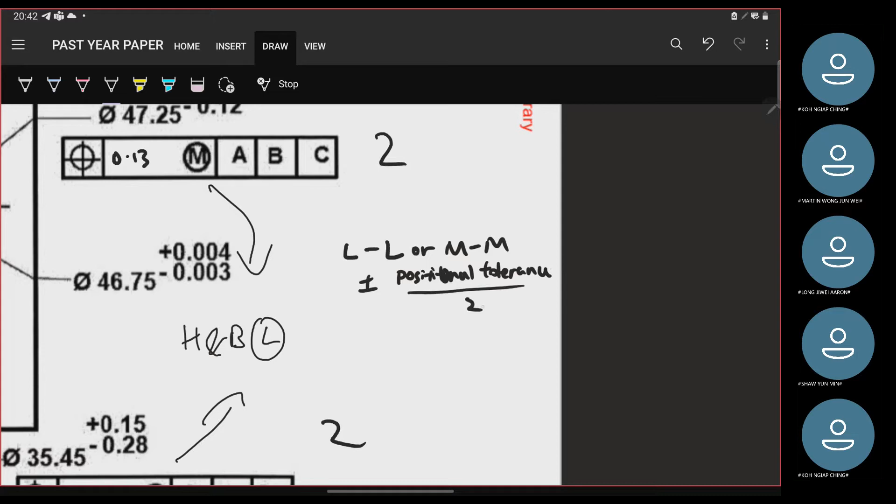So I'll write down the rough rule that you need. The rule is that if it's L with L or M with M, then you add or minus your positional tolerance divided by 2. But if it's L, M or M, L, you have to plus minus the positional tolerance and your whole tolerance band, divided by 2. What I mean by tolerance band is this part. You need to add the whole thing together.

So for example, in the first situation of D2, they tell you that H and B are at LMC. Because of that, LMC matches with the boss dimensions, but not the hole. So for the boss, it's going to be 0.1 divided by 2. Then for the hole, it's going to be 0.13 plus 0.33 plus 0.12, divided by 2. That's the whole thing that you need to shift. I know even the lecture slides are a bit confusing, but that's how you have to do it.

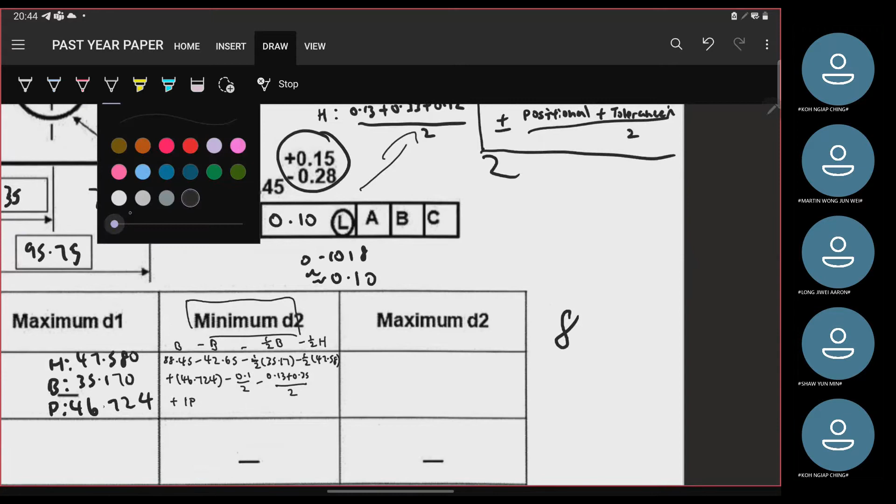It's a bit confusing, maybe I'll explain it a bit better next week. But essentially, that's the general rule that you need to follow. Now say we want to get maximum D2 instead. Instead of minusing, this time it's going to be a plus. The steps at the beginning are the same.

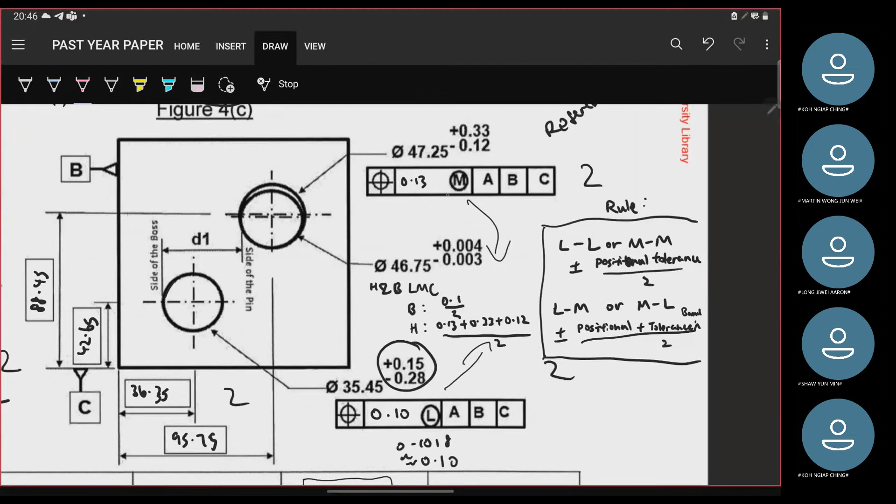The only thing that actually differs is usually this zone where you need to identify what to do. So let's say now I go into D1 first. Looking at the conditions, they tell you boss and hole are at MMC. So the hole condition matches, but the boss condition doesn't. The formula for this particular one, for D1, will be as follows.

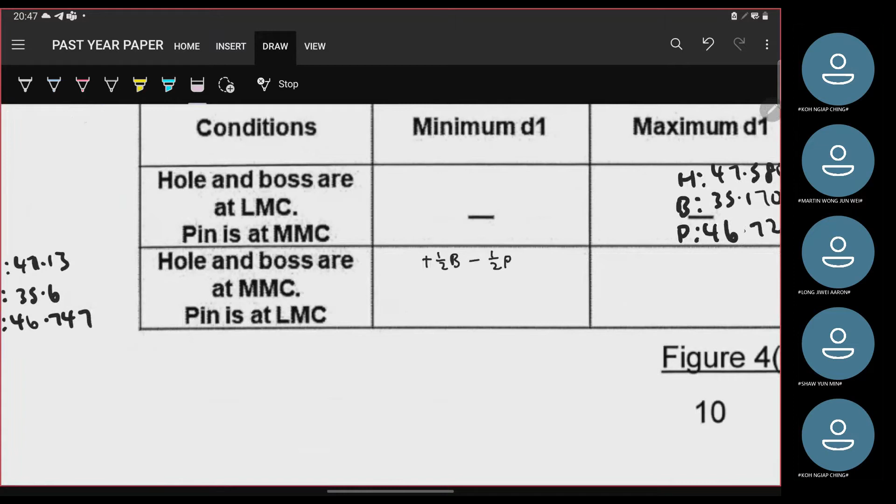Okay, so this is the general formula for this particular part. If you don't understand, maybe I don't write this part. Maybe I write gap instead. Gap plus half boss minus half a pin. Okay, the reason why, if you want to look at it, first is the gap, right? So this is the gap, right?

So to achieve D1, they tell you it's the side of the pin, which means you want this to move this way, right? So you minus half a pin. Then after, you want it to move this way, right? So this is plus half a boss. That is minus this, plus that. I hope that is quite intuitive. Okay, so this is how you get the gap, how you want to shift the things first.

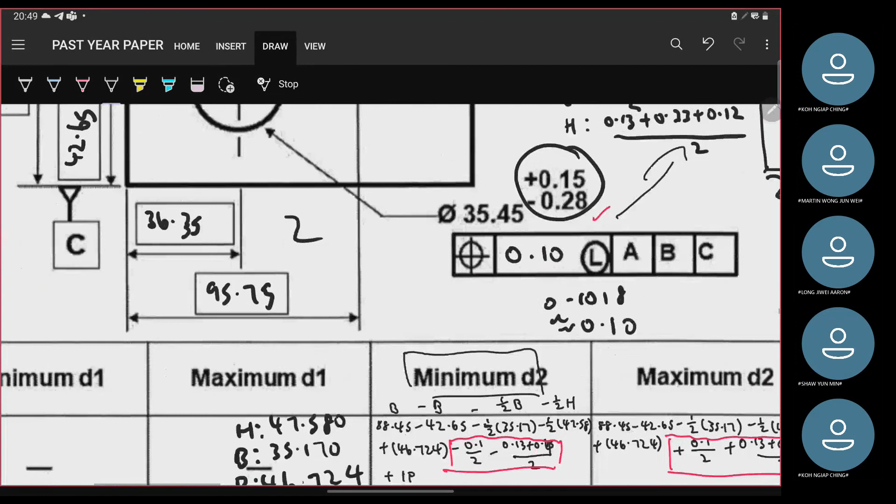Then after that they tell you, hole at MMC and boss at MMC as well. Based on position tolerance, you want minimum, so minimum is minus, right? You want the center lines to be as close together as possible. So it's going to be minus 0.1 plus 0.15 plus 0.28, 0.43. Because this one is L for the boss, but they give you M, so it's not matching, which means you need to add the whole tolerance. So 0.43 divided by 2.

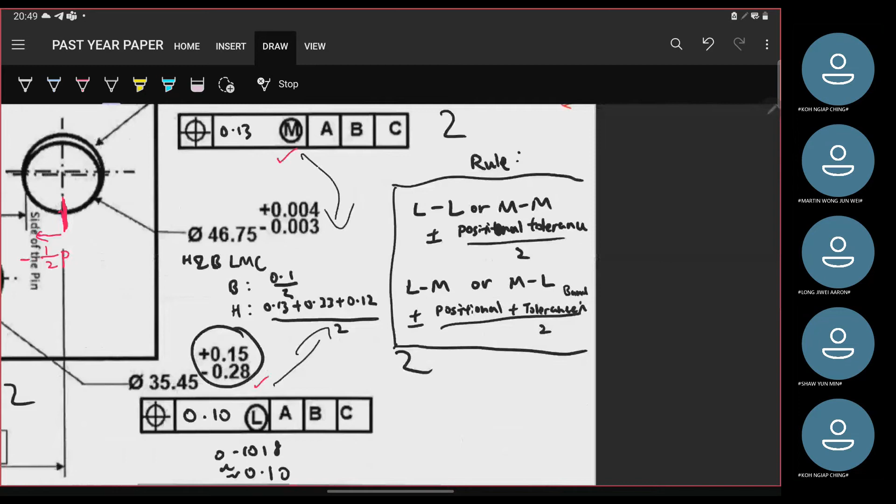Then after that, this is going to be minus 0.13 over 2. The reason why 0.13 is because the hole is at M, and your condition is also MMC, so it matches. So based on this rule, you only need to plus half the positional tolerance. Okay, so with that, this one I can just write: gap plus half a boss minus half a pin, and this time this one is plus because you want maximum, so you plus the whole thing, then minus a plus 0.3 over 2. Then you all should be able to get the answers for this.

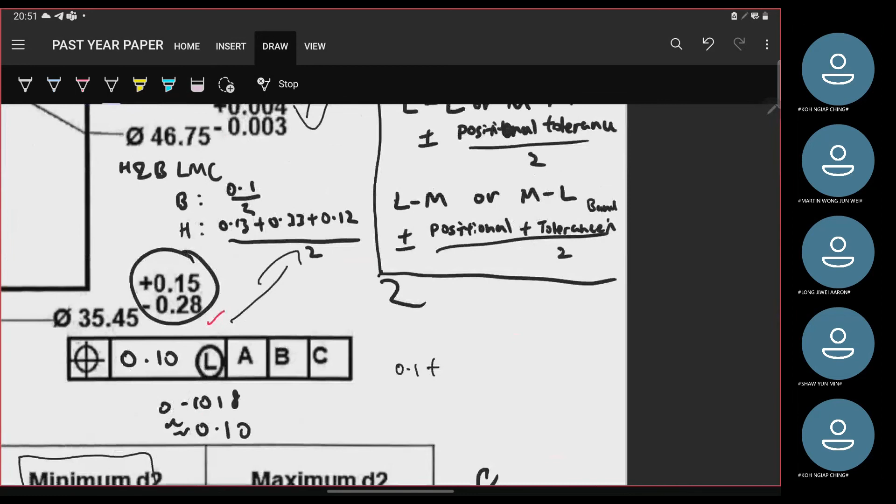So for this part, another way to check whether you are actually correct or wrong is to make sure that if you check between these two, minimum and maximum, the difference that you should have, for example for the case of D2, should be 0.1 plus 0.13 plus 0.45. So this is the gap that you should be having for the minimum to maximum of D2. So with that, that's about the end of this question already.

If you are able to do all questions till here, at this point, if no careless mistake or whatever, you should be able to secure the last 46 marks. Usually what I advise is to get the GD&T portion down first, because it's actually half the paper. Get your GD&T portion ready, then after that you can focus on the drawing portion, because the drawing portion will take a little more time. It'll be slightly harder to do as compared to just calculations.

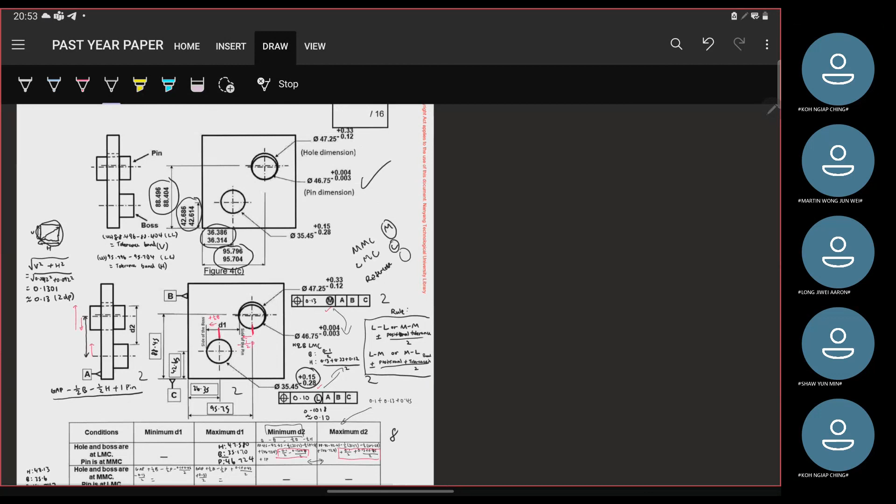If there are no questions, that will be what I have for today. For next week, for the last session, I will quickly run through some revision of question 1A all the way to 3A as well. But my advice is that you should be able to at least secure your last 3B and question 4 as well. Then you should put in some practice on the GD&T portion and not just your drawing, because the GD&T portion is half the paper as well. If you get that part, you can worry slightly less about your drawing portion.